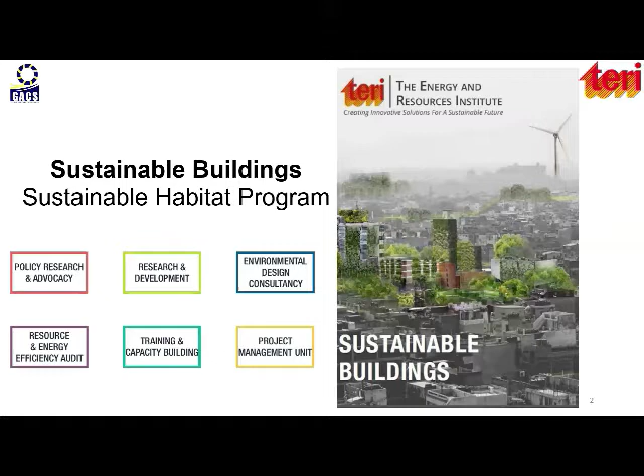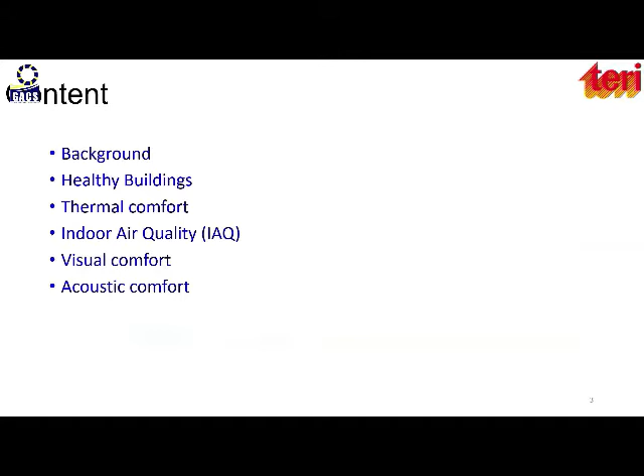The flow of the presentation will be: we'll give a brief background on buildings and healthy buildings, then majorly we will cover 4 components of indoor environmental quality, that is thermal comfort, indoor air quality, visual comfort, and acoustic comfort. So talking about buildings, the rising living standards and growing population has dramatically increased energy consumption and greenhouse gas emissions as well.

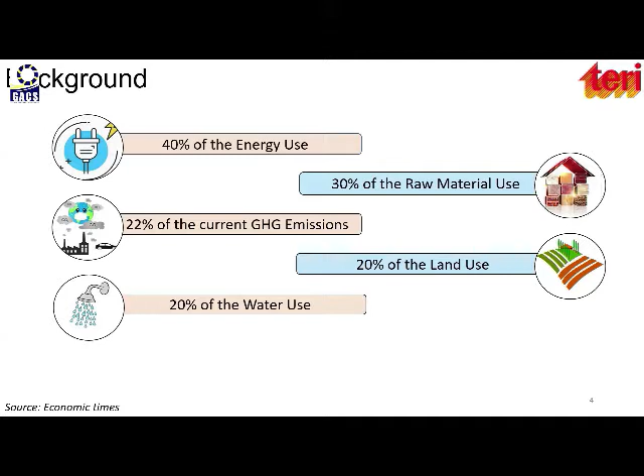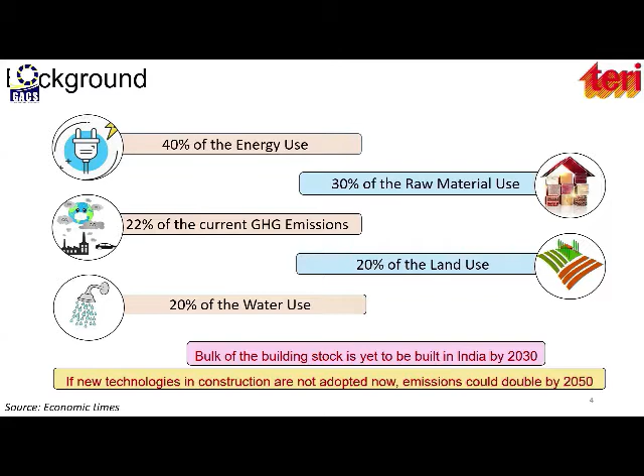It has been anticipated that these emissions will increase by about 700% compared to 2005 levels. So in this scenario, buildings, which are great consumers of different resources including energy, raw material, land, and water, will significantly contribute to this. It is also to be noted that the bulk of building stock is yet to be built in India by 2030. So under all this scenario, the role of green buildings becomes vital.

And so looking towards green buildings, they definitely incorporate all the environmental considerations at each stage of building design, and they focus on operation, maintenance, and construction in a very resource-efficient manner. So most of the green building certification bodies, like GRIHA, LEED, IGBC, WELL, EDGE, they all focus basically on site sustainability, water efficiency, and energy efficiency.

They also focus on waste reduction and management. They incorporate renewable energy integration and also focus on using recycled and environmentally friendly building materials, which significantly reduce the load of green buildings. So looking at all these positive aspects of green buildings, it has been found that...

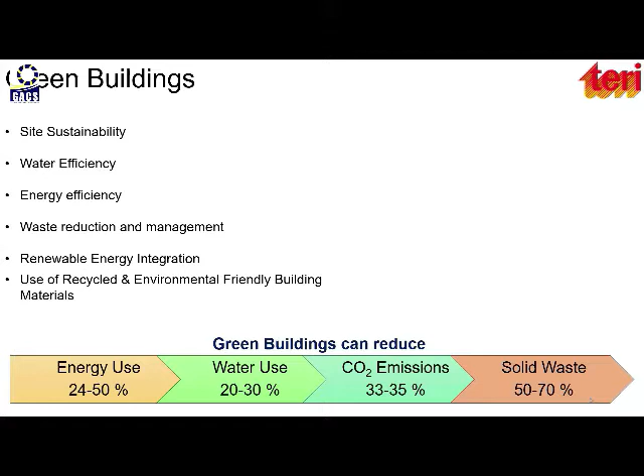Green buildings can reduce significant amounts of energy, water, emissions, and solid waste. In addition to this, green buildings also provide the benefit of having lower operational and maintenance cost. Then they reduce GHG emissions significantly and enhance the indoor environmental quality.

It has also been found that when a person operates in a well-ventilated green building, their brain function increases up to 101%, and due to this increased brain function, it has also been reported that the productivity of people increased by approximately 16%. In addition to this, people who have been living in green buildings have been reported to have better health and well-being.

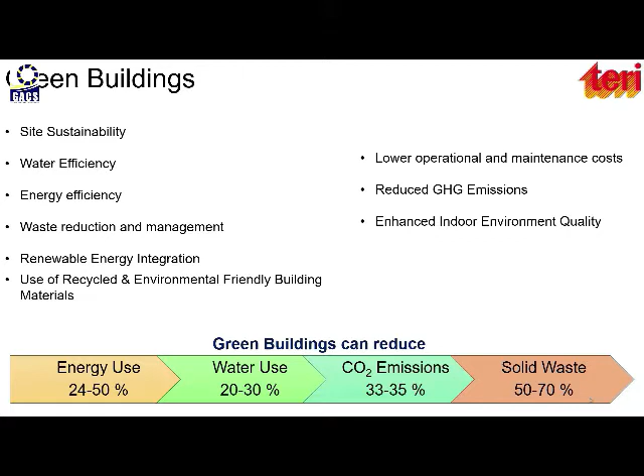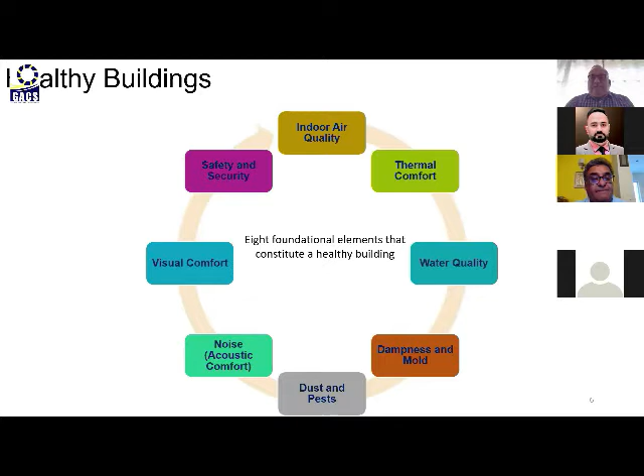So talking about healthy buildings, there are basically 9 foundational elements. Ventilation is covered mostly under thermal comfort and indoor air quality. So here I have mentioned approximately 8 foundational elements: indoor air quality, thermal comfort, water quality, dampness and mold, dust and pests, noise levels equivalent to acoustic comfort, light levels that is visual comfort, and safety and security.

So out of these 8, indoor air quality, thermal comfort, noise or acoustic comfort, and visual comfort are found to have the strongest impact on human health and comfort. So in this webinar, we will be focusing on these 4 points, and these 4 components together also make up the indoor environmental quality.

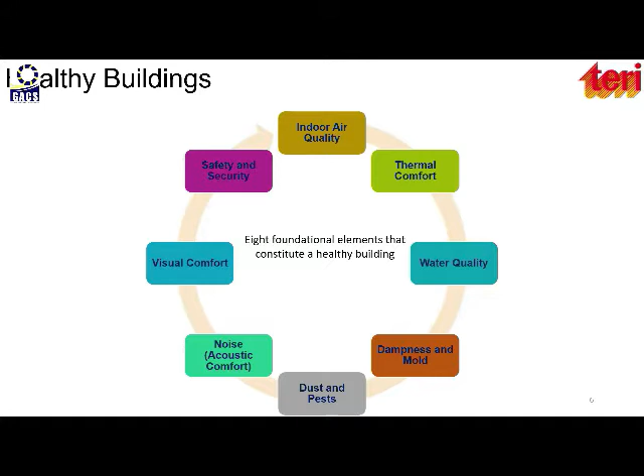So talking about thermal comfort, it is defined by the American Society of Heating, Refrigerating and Air-Conditioning Engineers, ASHRAE, as a condition of mind that expresses satisfaction with the thermal environment, and it is usually measured as a subjective thing.

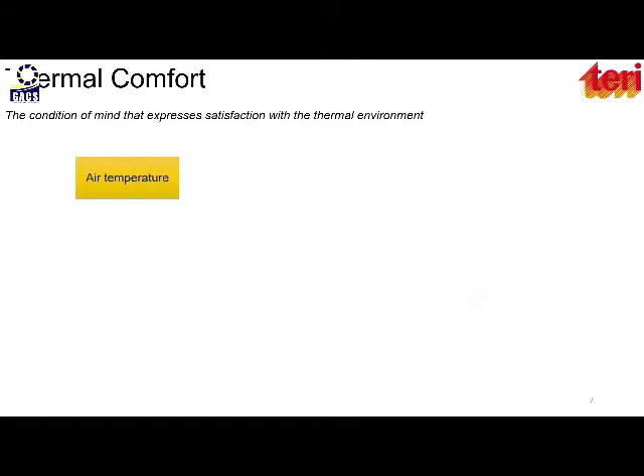Thermal comfort levels for people vary depending on their location, thermal history, the conditions they are in, and their expectations. There are six parameters which influence the thermal comfort of building occupants: air temperature, mean radiant temperature, humidity, airspeed, metabolism, and clothing.

The first four parameters are known as environmental variables, and they mainly depend on the conditions inside the building. Indoor conditions largely depend on the HVAC systems used, the building design, and the outdoor conditions being witnessed.

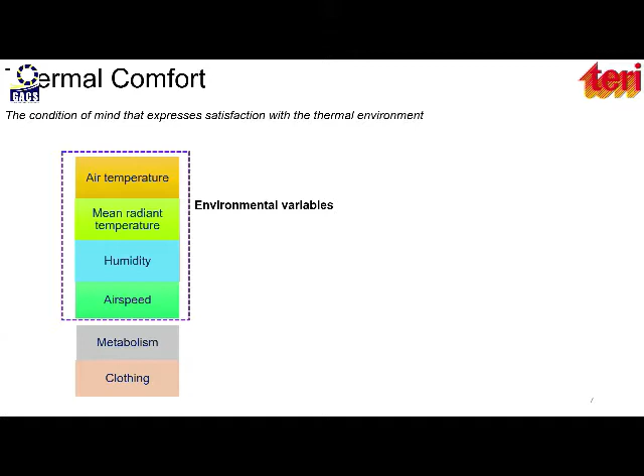The last two, metabolism and clothing, are personal variables that are user specific. Metabolism represents what kind of activity you are involved in, such as running, sleeping, or doing light desk work, so metabolic rate varies from activity to activity. Clothing reflects that in summer we opt for light clothing, and in winter our clothing gradually increases. So this is user control, while the other four are usually in the control of building operation.

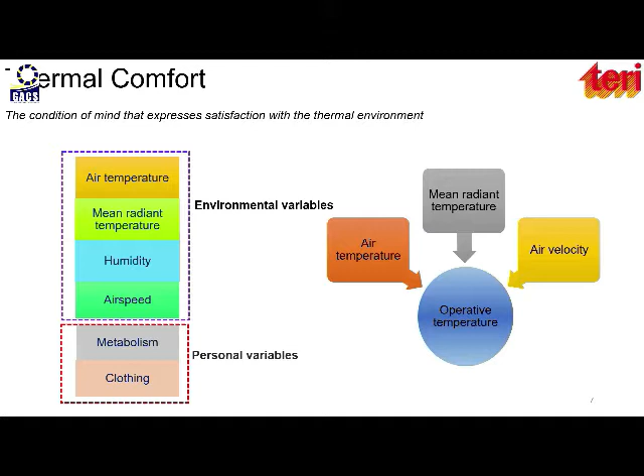Out of these environmental parameters, operative temperature has been found to best reflect comfort levels. Operative temperature includes air temperature, mean radiant temperature, and air velocity.

All of us generate heat continuously inside our bodies, and we are also continuously exchanging heat with our outdoor environment. Whenever there is an imbalance between these two parameters, a state of thermal discomfort arises.

Based on this approach, two correlated thermal comfort indices were introduced: predicted mean vote, PMV, and PPD. Even the famous thermal comfort standard from ASHRAE, the American Society of Heating, Refrigerating and Air-Conditioning Engineers, ASHRAE 55, focuses on thermal comfort and used to follow this approach.

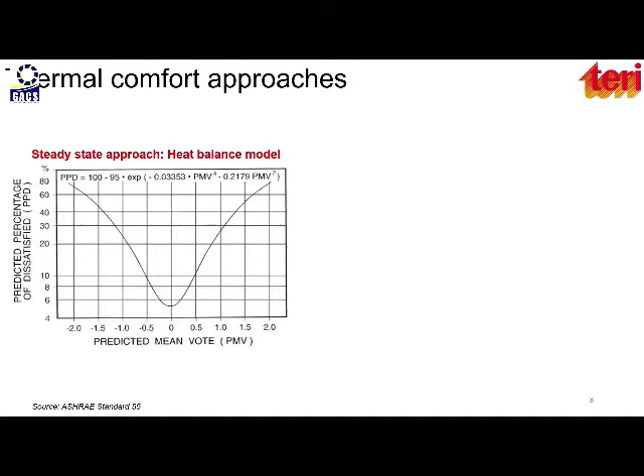But lately, because this approach was developed based on studies carried out in well-sealed buildings of Europe, mainly Denmark, it was found to underestimate the comfort level of people living in tropical countries like India, which witnesses high temperatures and has different socio-cultural differences, plus different adaptations.

So recently, a decade back, the adaptive approach of thermal comfort was introduced, which takes into account the behavioral and technological adjustments people make, their habituation, and their acclimatization.

The adaptive approach of thermal comfort believes that whenever there is a condition of discomfort, people try to restore their comfort using adaptive actions like operating fans, opening and closing windows accordingly, adjusting thermostats, and taking hot and cold drinks. There are different adaptive actions found in buildings, and these greatly impact the thermal comfort of people.

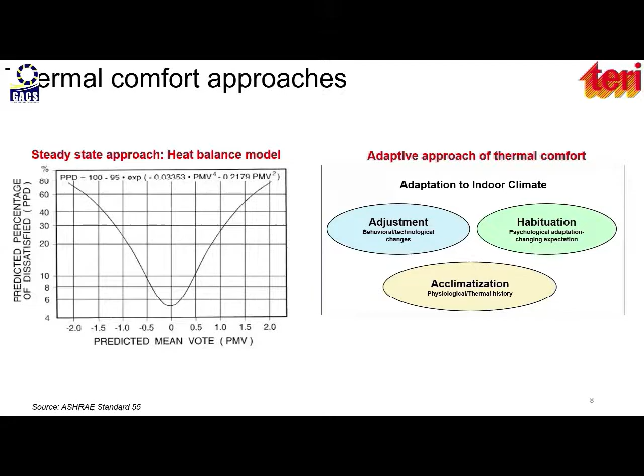Adaptive thermal comfort research has found that the comfort boundaries proposed by the steady state approach are very stringent and very narrow for Indian subjects, and a lot of field studies have found evidence that the PMV-PPD model underestimates our comfort.

In one of the studies I was involved in, I did my doctoral research studying the thermal comfort levels inside evaporatively cooled buildings. So basically, you see this psychrometric chart.

On the x-axis there is operative temperature, and on the y-axis there is specific humidity. This red zone is the thermal comfort zone by ASHRAE 55 based on the steady state approach, and it is assumed that if an indoor condition falls inside this zone, it will be comfortable for the building occupant.

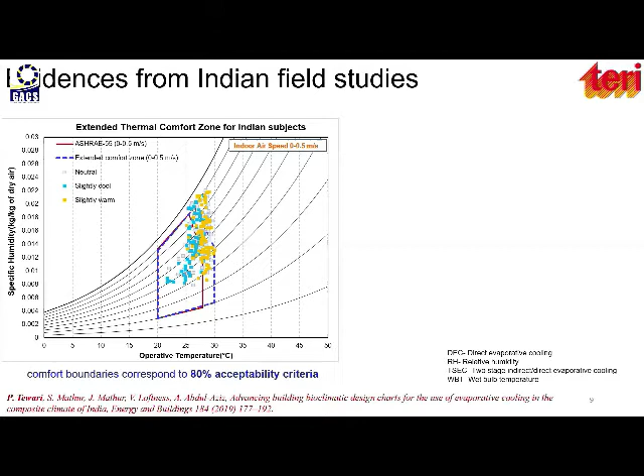But when we collected responses from approximately 1,500 people working in evaporatively cooled buildings, we found that more than 50% of the subjects were falling outside this zone. Based on different types of adaptations, we resketched the comfort boundaries based on an 80% acceptability criteria, and found that at different ranges of indoor air speeds, the comfort boundaries were expanded, which can be seen as evidence that people living in tropical countries are comfortable at higher temperatures.

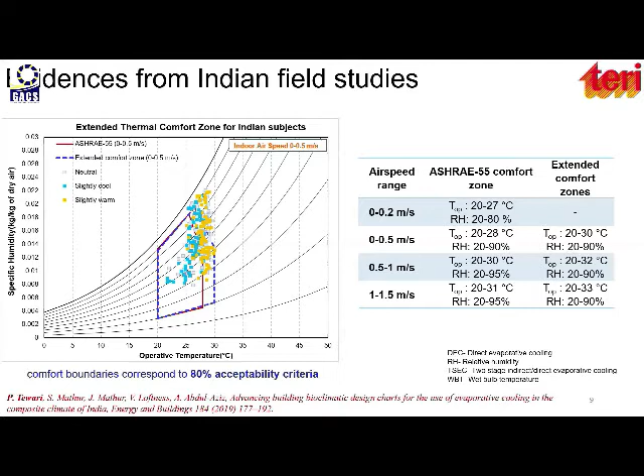Now, if we talk about thermal comfort bandwidths, we cannot say there is one particular temperature or RH at which people will be comfortable, but there will be a particular bandwidth within which people will find comfort, because it is a subjective thing, and we need to see that approximately 80% or 90% of the population is comfortable.

Recently, ISHRAE launched its IEQ standard, in which it focused on the 4 parameters of IEQ, and also looked at thermal comfort for different types of buildings having low and medium activity values. The comfort ranges were defined for summer and winter season.

If you look at the RH in the comfort zone, we had presented that RH up to 90% was comfortable. But recently in ISHRAE COVID-19 guidelines and different studies carried out across the world, it was found that RH between 40 to 70% definitely reduces the chances of COVID infection spreading. So higher temperatures and RH between 40 to 70 will be taken as an optimum combination for resuming thermal comfort inside buildings.

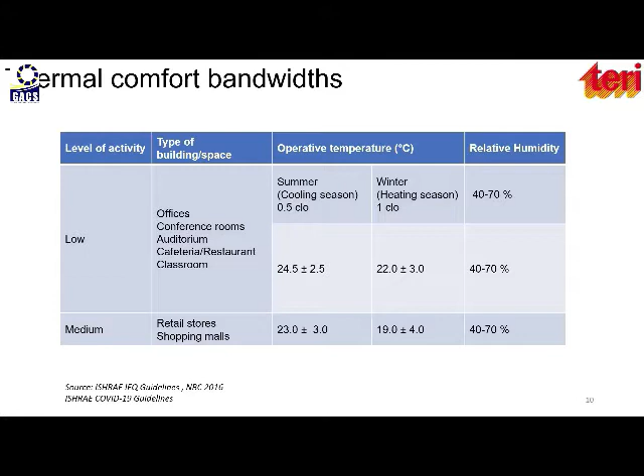Now, talking about how to attain comfort through buildings: building design will be the first step. Building design looks at what your orientation will be, what the window wall ratio is, how the envelope is designed, what passive heating and cooling strategies you are using, and how shading and means of ventilation are taken care of.

So basically, if we are living in a hot climate, light colored surfaces usually reflect most of the radiation. Then also using high thermal mass - in summer season, it has been recorded that thermal mass reduces indoor temperatures by up to 7 degrees centigrade.

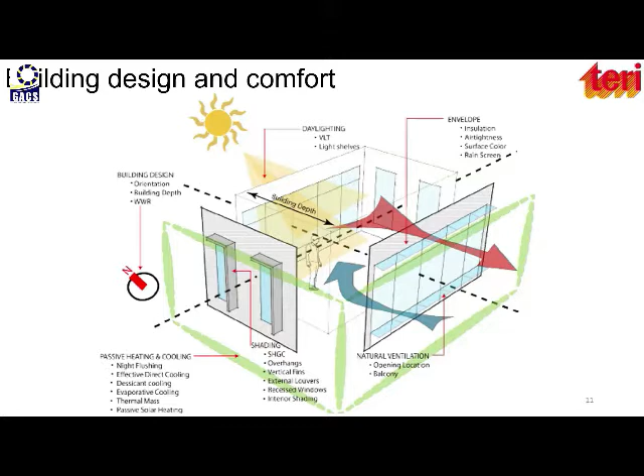So incorporating such strategies can definitely yield a higher degree of comfort, and green buildings are designed taking into account all of these design strategies. It has been found that this clearly reflects your comfort.

Now, one of the studies prioritizes the most effective strategies for achieving indoor comfort across different climatic zones. Since India is a country of diverse geographical features with varied climatic conditions across the nation, based on climatic classification of India, which is classified into 5 climatic zones - if we talk about Ahmedabad, which falls in hot and dry climate...

Sun shading, night cooling, air tightness, and insulation can be very effective. All six strategies can approximately lower your air conditioning load by up to 4 to 5 times.

Similarly, in warm and humid climates, if we see that most of these climates are found near coastlines, coastlines usually have a cool breeze running in the evening, so night cooling is found to be very effective in these areas. Similarly, in composite climate, these strategies also provide very comfortable conditions.

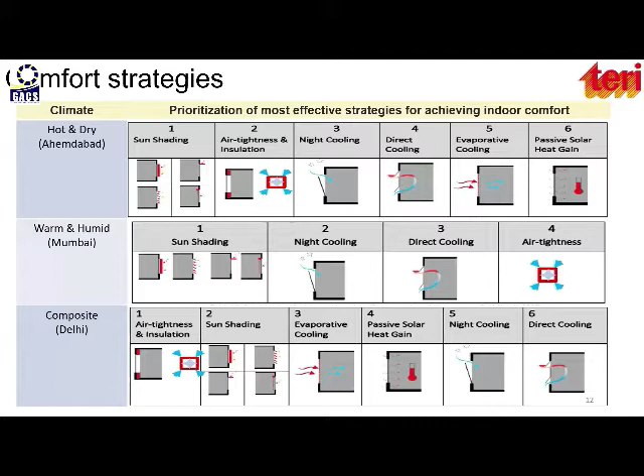If we talk about temperate climate, then sun shading, insulation, night cooling, and direct cooling are very effective strategies which help you achieve indoor comfort.

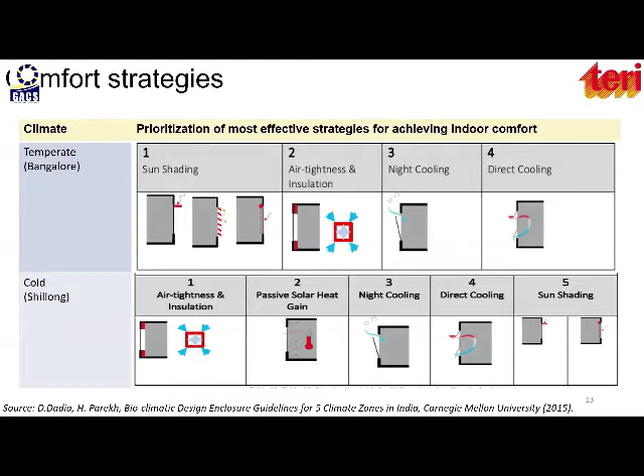And in cold regions like Shillong, air tightness, insulation, and passive solar heat gain are most effective to reduce your heating loads. Shillong also witnesses some time of summer, so night cooling, direct cooling, and sun shading are effective in these areas.

Jumping on to indoor air quality, we all know that indoor quality includes all the chemical, radiological, biological, and physical pollutants. ASHRAE Standard 62, which focuses mainly on ventilation of buildings, defines acceptable IAQ as air in which we have contaminants, but not at harmful concentrations, and witnessing that the majority of people are satisfied with the prevailing indoor air quality.

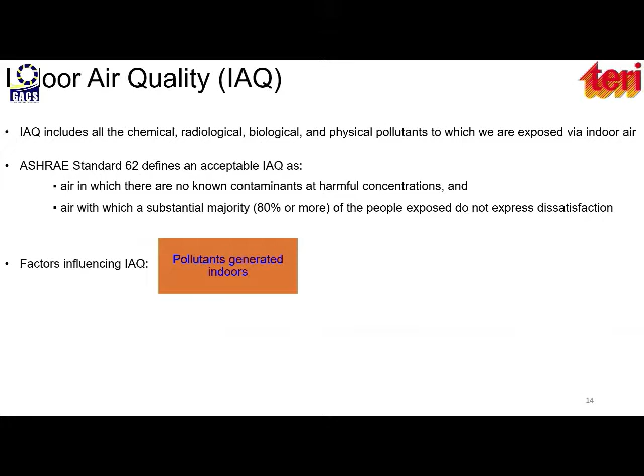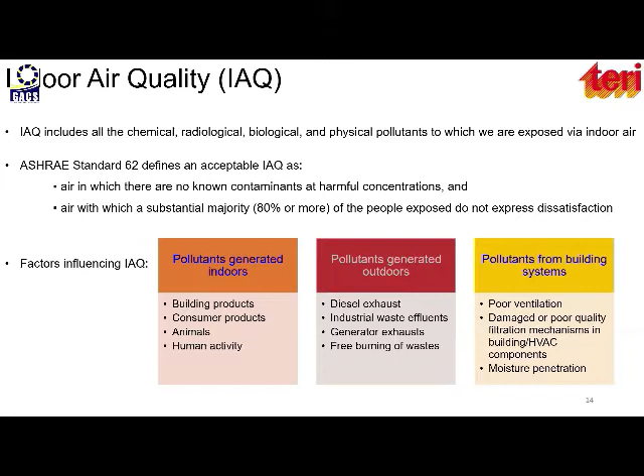Now, what are the factors which influence indoor air quality? First, pollutants generated indoors through building products, human activity, consumer products. Pollutants generated outdoors, such as diesel exhaust, generator exhaust, and burning of waste. And pollutants from building systems, which come through poor ventilation, faulty filters, and moisture penetration.

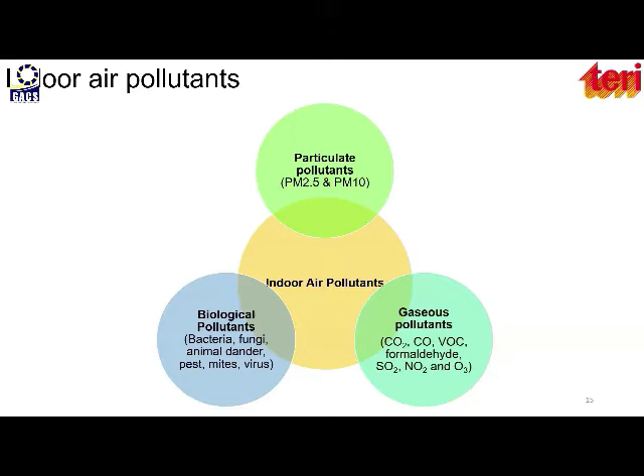Now, when we monitor indoor air quality inside buildings, mainly 3 components are looked into. One is particulate pollutants, that is PM 2.5, PM 10. Gaseous pollutants - CO2, CO, VOC, which is volatile organic compounds, then formaldehyde, sulfur dioxide, nitrogen dioxide, ozone. And biological pollutants - bacteria, fungi, mites, virus, etc.

So in the ISHRAE IEQ guidelines, there are basically 3 classes in which you can assess your indoor air quality. Class A being the most stringent one - occupant satisfaction here means you should achieve at least 90% of people satisfied with the prevailing indoor air quality. Then class B, then class C, and also some basic IAQ parameters which you need to record, and then complementary IAQ parameters.

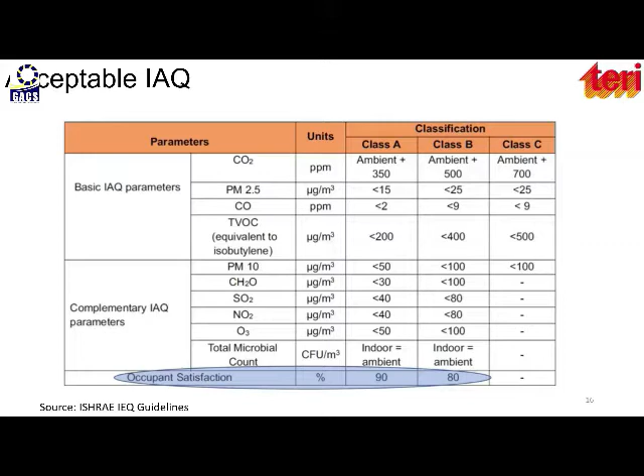Now, if we talk about indoor air quality, what should be our strategies to maintain indoor air quality? First is source control - reducing our contaminants at the source level.

So basically using paints which do not have formaldehyde or volatile organic compounds. Then there are so many furnitures which continuously emit these. So we should reduce all of these sources for maintaining IAQ.

Ventilation has been found to be most effective in maintaining indoor air quality. So regular performance and monitoring of ventilation systems is very important. If we are having ventilation systems, we should continuously look at what all ducts we have, then cleaning of dampers, which enhance the ventilation. It should not be the case that the ventilation mechanisms are in place but not functional properly, or in a degraded quality, which instead of improving your IAQ, degrades it. So continuous check on these is very important.

Lastly, air cleaning. First is air purifiers. So if we place them inside a room, they will purify your air. Also, if we have filters in your air conditioning unit or in fans, continuous cleaning of these is important, because it will definitely reflect in your indoor air quality.

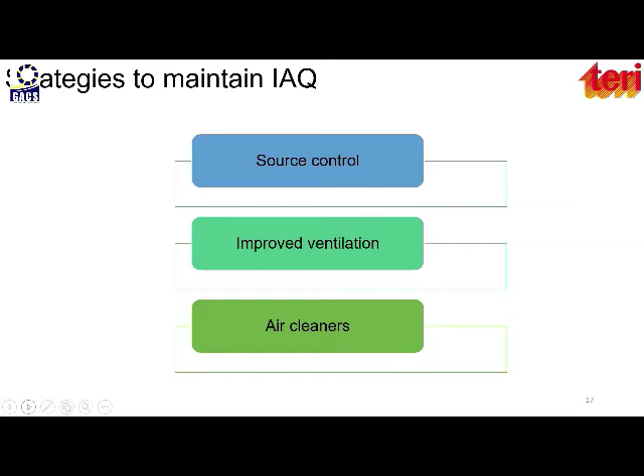This was all about IAQ and thermal comfort. Now I would like to invite my colleague, Ms. Ankita Bhokhar, to tell about visual comfort and acoustic comfort.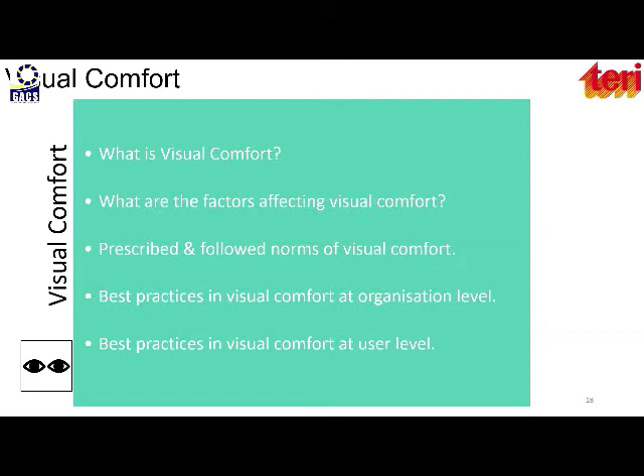Beginning with visual comfort, let us understand what is visual comfort. In the simplest sense, visual comfort is our reaction to the quality and quantity of light within any space at a given time. The concept of visual comfort depends on our ability to control the light levels around us. Both too little and too much light can cause visual discomfort.

It encompasses various aspects such as access to views of outside spaces, quality of light both in terms of temperature and color, luminosity, which refers to the total amount of light a source emits, and the absence of glare. While these parameters help us understand what governs visual comfort, it would also be helpful to understand what is visual discomfort actually.

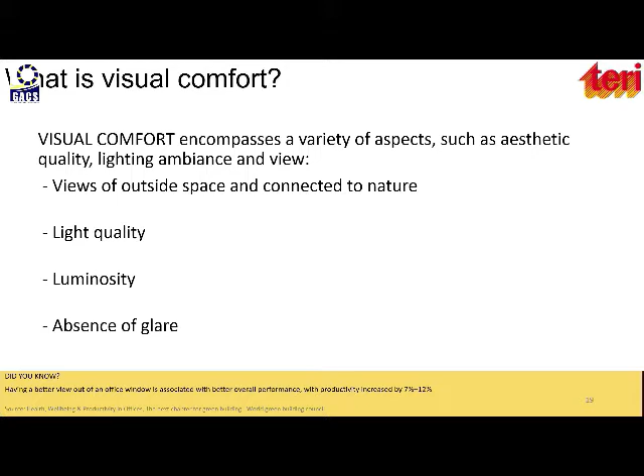Visual discomfort is experienced through glare and extreme lux levels that may impair us from performing tasks that require visual engagement.

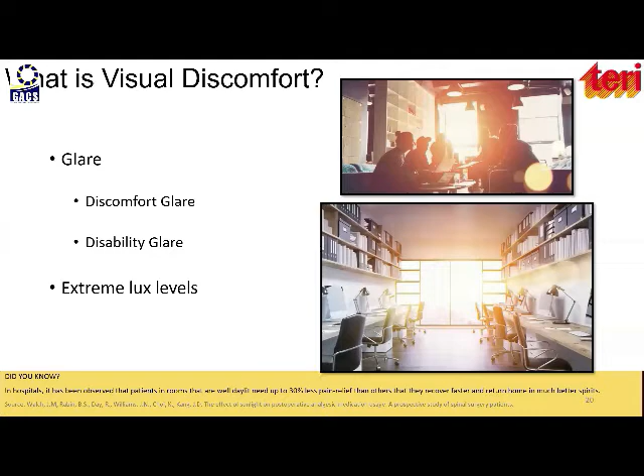One common example of this is driving on a highway during a hot summer afternoon. An example of experiencing visual discomfort in a building is when a person's desk is placed too close to a window without any blinds or shading, and they experience glare reflected from adjacent streets and neighboring buildings. Another example of glare is when a person's desk or computer screen is aligned such that light from the window falls directly on the screen, making them unable to view the display unit properly.

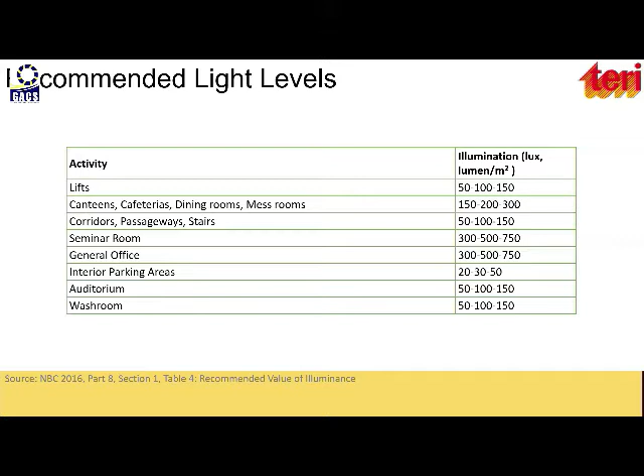Similarly, the lower value of the range may be used when reflectances and contrast in the space around, or the surfaces of a space, are high, and the speed or accuracy of the task being performed there is not of that importance, or maybe the task is seldom done in that space.

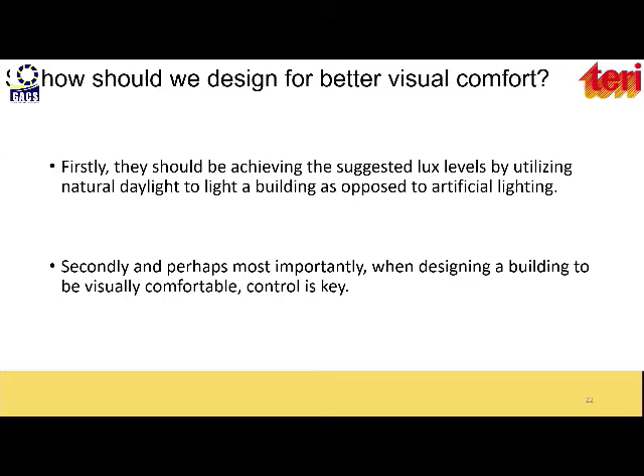So how should we design for better visual comfort? Firstly, we must fulfill our lighting demands via natural lighting as much as possible. Secondly, and most importantly, when aiming for a building to be visually comfortable, giving the control of lighting is key. This means separate zones of a particular space should be able to have access to light modulation as and when required, depending on user preference and the task being performed.

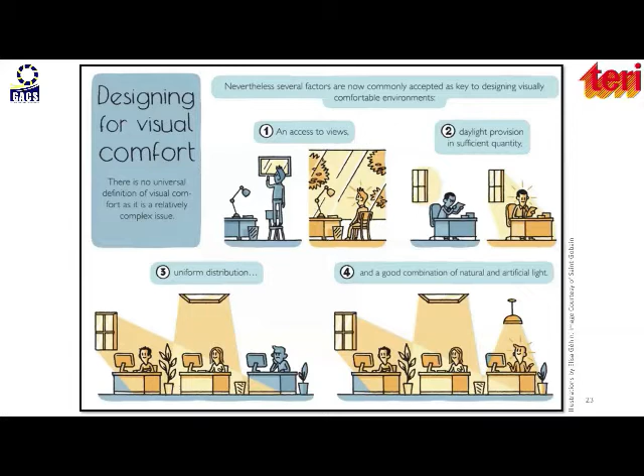The aesthetics of an interior space also rule how a user perceives it and attains visual comfort. Moving on, the building material we select plays an important role in the way we attain visual comfort. This is why many products in the fenestration market have gained popularity based on their properties to restrict heat and glare from entering the building, giving us a comfortable experience inside.

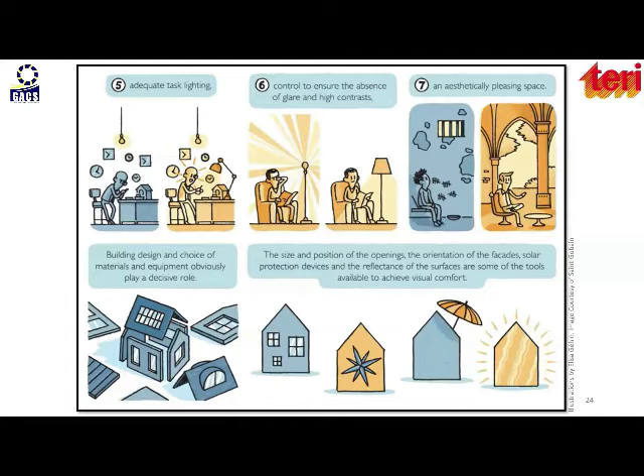These are mostly specialized glasses that cut out glare, tinted glasses, and specialized films that attain the same task. Also, a very important aspect to consider while planning buildings and spaces is the size and position of openings, and their orientation on the facade with respect to solar movement.

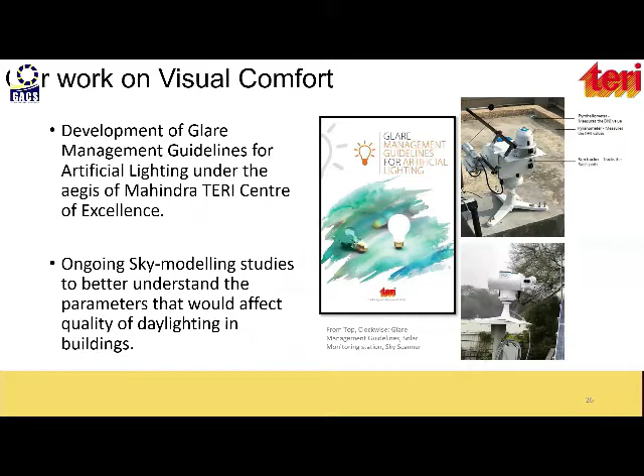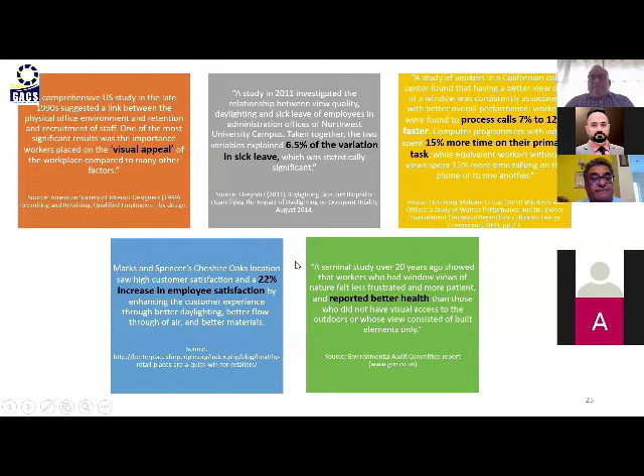In the past decade, as more research was done on aspects of visual comfort, promising results were observed that encourage building practitioners everywhere to incorporate these measures. To summarize, better visual comfort has been observed to lead to better staff performance, overall health of users, fewer sick leaves, better focus on tasks, and increased productivity in office spaces. Examples from the retail sector show increased employee satisfaction and enhanced customer experience, leading to longer durations of engagement and better response in retail.

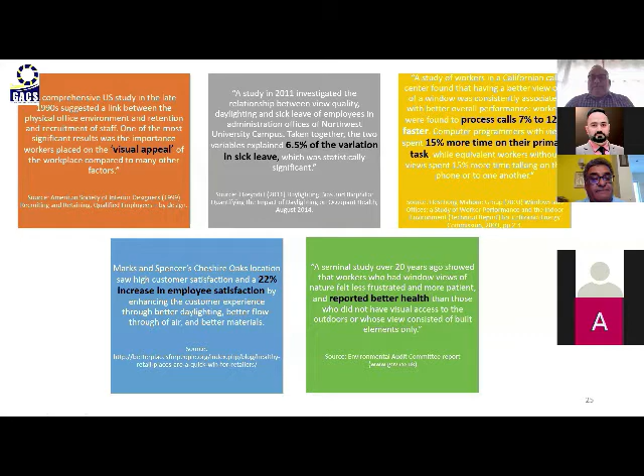It gives me great pleasure to share that we at TERI have been doing some technical work in the domain of visual comfort ourselves. We launched a glare management guideline for artificial lighting under the scope of work for the Mahindra TERI Centre of Excellence for Sustainable Habitat. Also under the same project, we are currently developing a sky model study that would give us details of the quality and quantity of daylight available for designing buildings for daylighting.

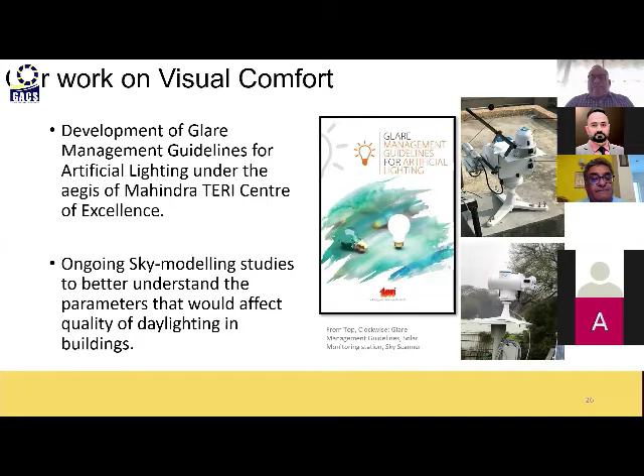Moving on to the aspect of acoustical comfort. Acoustical comfort is the perception of well-being users of a building have with respect to its acoustic environment, which consists of noise produced by elements present indoor and outdoor the building. Designing for acoustic comfort consists of minimizing intruding noise to maintain satisfaction among users.

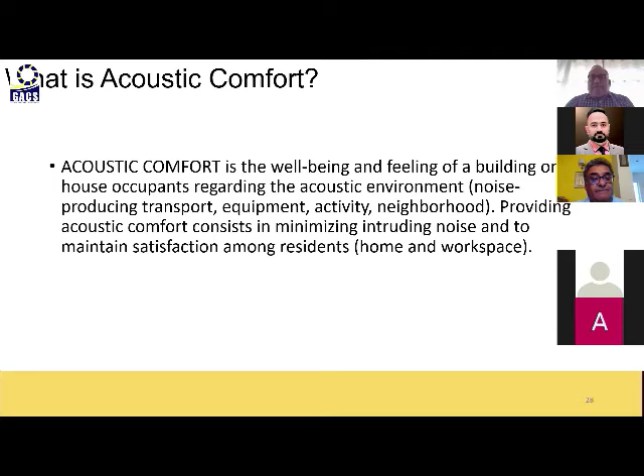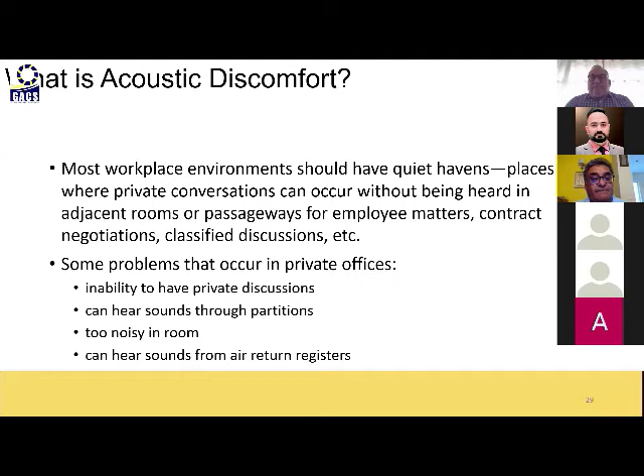To understand acoustic comfort better, it's easier to find out what causes acoustic discomfort. Ideally, most workplaces should be such that the sound of conversation or other tasks being performed should not percolate out of a space, leading to disturbance to others. Common acoustical issues faced by many of us are the inability to have a private discussion, hearing noises from adjacent spaces through partitions, too much noise in a room during conversation, and hearing sounds from air registers.

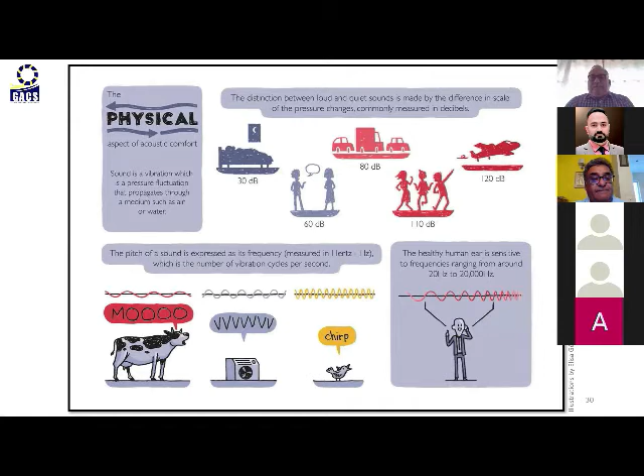Having said this, let us understand the physical aspect of acoustical comfort. The distinction between loud and quiet noises is made by the difference in the scale of pressure changes, commonly measured in decibels. The pitch of any sound is expressed as its frequency, which is the number of vibration cycles per second. A healthy human ear is able to sense frequencies ranging from 20 to 20,000 Hertz.

Coming to designing for acoustic comfort, the first thing to realize is the purpose of the space. What kind of activities are to be performed in the area? What types of noises need to be managed to ensure the best task performance? For example, is the purpose of the space to contain noise created in the interiors, or to restrict noise created from exterior sources? What is the spectrum of noise to be managed in terms of decibel level and pitch level?

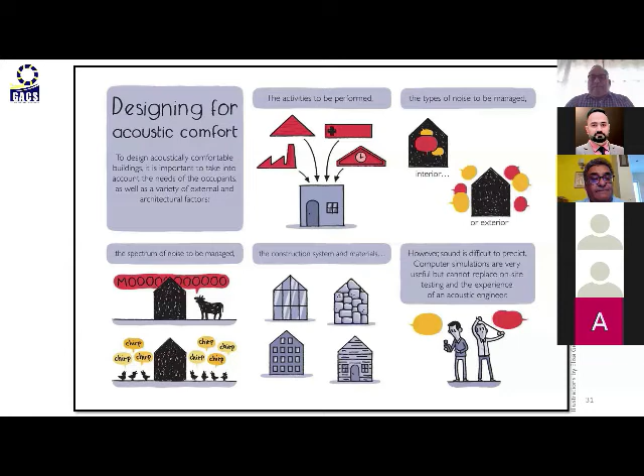The material used in a space plays a major role in this. For example, a stone monument is more echoey compared to a wooden auditorium, which is why since history, theaters and auditoriums have used various sound absorbing and dampening materials such as wood and fabric. In recent times, these have been successfully replaced by more efficient and specially designed acoustic boards and panels.

Prolonged acoustical discomfort in the form of noise may lead to numerous undesirable effects on health. Exposure to noise at night may lead to disturbed sleep patterns, leading to compromised productivity during the day. Studies have shown that well-designed sound environments lead to better performance by its users.

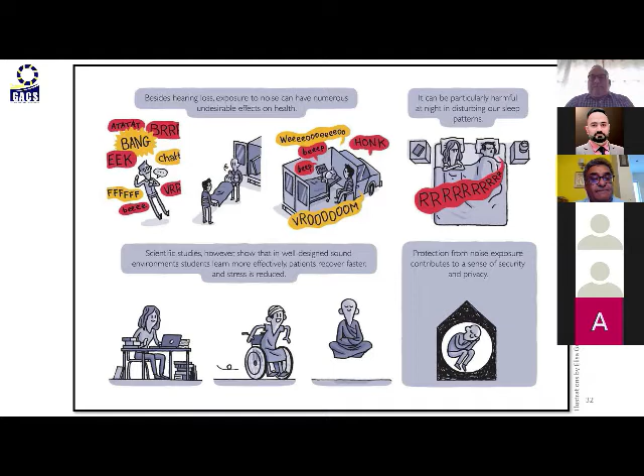The various types of sound we may experience in a building are exterior noises from traffic or activities outside a building, such as construction activities in nearby areas; interior noises from sources present inside the building; impact noises from certain activities being performed in the building; and equipment noises from equipment such as lifts, air handling units, chiller plants, and boiler rooms. This is why chiller plants and boiler rooms are not really placed in very habitable spaces of a building.

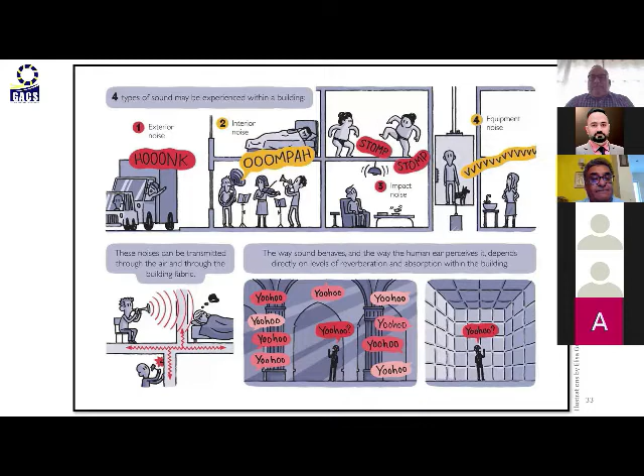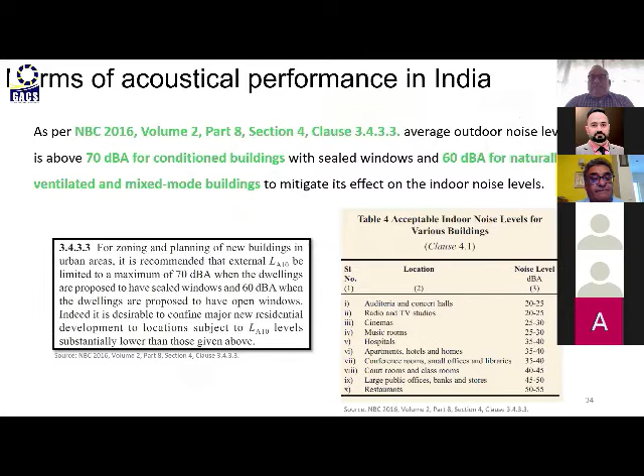To ensure standard acoustical performance, NBC 2016 lays out guidelines for what should be the decibel levels in a particular space at a particular time. Identifying excess and uncontrolled noise as a form of pollution, the Central Pollution Control Board lays out guidelines with respect to acceptable levels of noise in different zones of a city, during both day and night times.

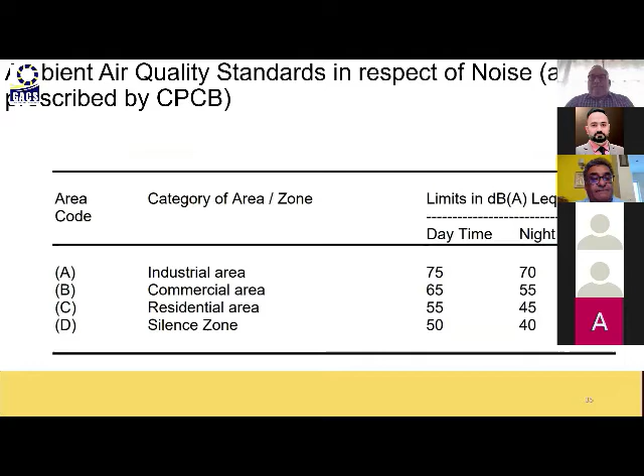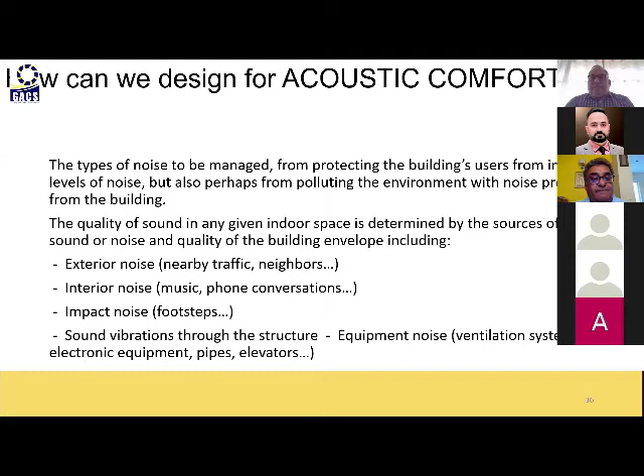So having discussed the desirable and undesirable levels of acoustic condition, how do we design for acoustical comfort? Firstly, we need to understand what kind of noises we are looking to manage in a particular building. This is governed by the source of noise and the building envelope and its ability to absorb or reflect that noise. Once identified, all we need to do is understand the ABCs of acoustic design.

The ABCs of acoustic design stand for absorb, block, and cover. These are usually achieved by various building products such as perforated ceiling tiles, solid cubicle partitions, sound masking panels and boards, and sealing the air gaps between spaces that allow passing of sounds and noise from one space to another.

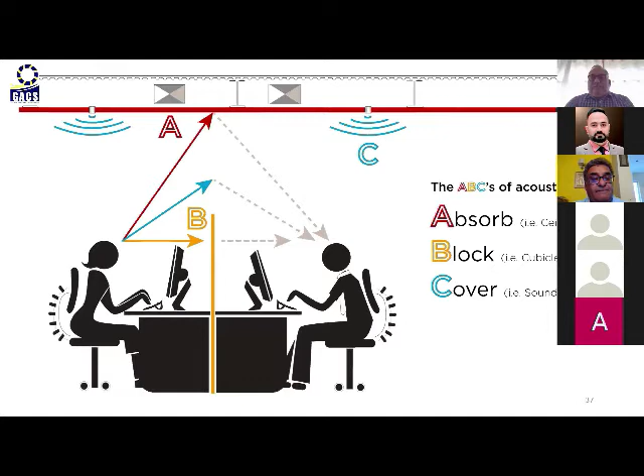Considering acoustical comfort in the exterior premises of a building, one could incorporate a buffer zone in the building plan that places the occupied part of a building away from the noise source. This is a classic example we mostly see with bigger plot sizes: the side facing the road usually has a garden or trees, while the habitable part of the building is placed away from the road area. Protection of habitable spaces by introduction of green belts and public gardens.

In case of multiple buildings in a project, the less vulnerable building is positioned closer to the noise sources than the vulnerable building. For example, in recent residential apartment complexes with multiple residential towers, common spaces such as community spaces or market complexes are placed more towards the road than the residential towers themselves. Further measures include shading and screening by providing solid barriers such as a wall, and provisioning of adequate sound insulation in the building envelope on the walls and roofs through the ABCs we just discussed.

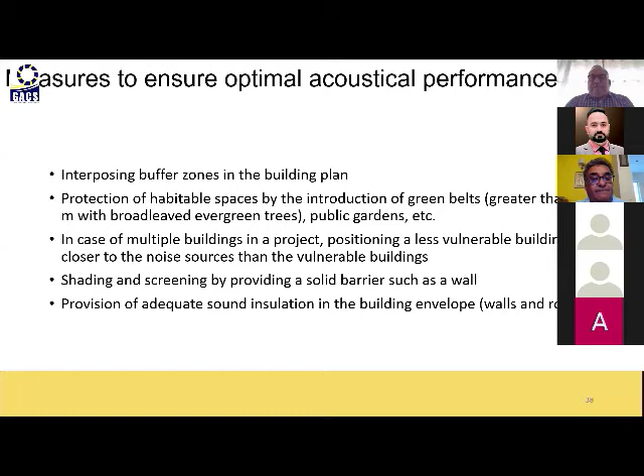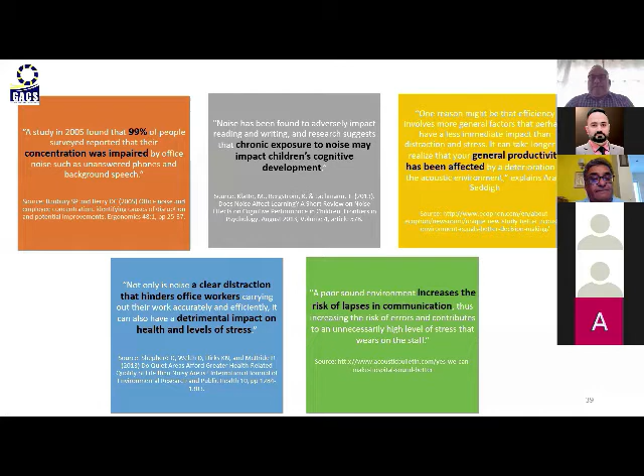Folks, any questions, anybody?

Mr. Seth, I had a question from VP Singh Chundawat. He is the leader in Jaipur, our Rajasthan chapter. He had to leave early, but he sent the question directly to me. He asked, can we propose any solutions to Delhi government schools, which are multi-story buildings, to provide a safe and healthy environment in these times when schools reopen? Could you please get my question?

Okay, I was not able to unmute myself. Yes, I'm sorry, can you repeat the question please? He mentioned that, can we propose any solutions to Delhi government schools, which are multi-story buildings, to provide a safe and healthy environment in these times when schools reopen? Basically, he's from CSR activities, looking after CSR in various organizations across Rajasthan and NCR. His concern is, it's a very nice proposal, what can we do for Delhi government schools?